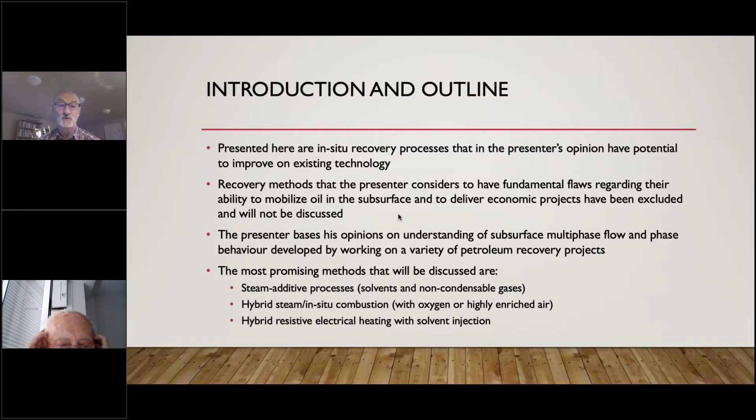So as I said, I'm presenting those technologies that I think have a lot of potential, and I've left out anything about those projects that I don't think are going to be very good. I'm basing my opinions on understanding that I've developed over the years of how fluids flow in reservoirs in the subsurface. And this comes from many years of working on a wide variety of different kinds of projects, conventional gas projects, unconventional gas projects, secondary recovery projects, thermal recovery projects, and so on.

The most promising methods that I think exist are steam additive processes, and those additives are solvents and non-condensable gases. Hybrid steam and in-situ combustion processes, especially using oxygen rather than air, oxygen or highly enriched air, and hybrid resistive electric heating projects along with solvent injection. So those are the three categories that I think hold the most promise for improvement.

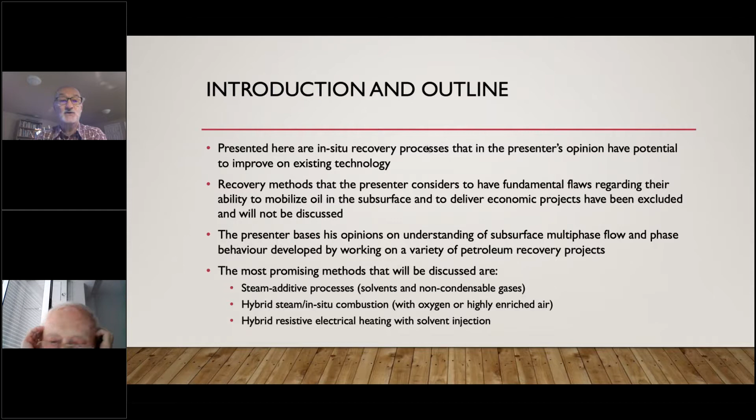Currently, for the first time in many years, we have high enough oil prices for companies to actually make a reasonable profit. We've had a lot of opposition to the petroleum industry developing over the last few years. And in Canada, this has resulted in opposition to pipeline development, which has essentially truncated heavy oil and oil sands development, because without export capacity, there's no point in developing more production capability.

Around the world, carbon penalties are gradually being imposed by governments. And so if you can find recovery methods that reduce the carbon emissions, as time goes on, this is going to have benefit to your oil production operations and the economics of those projects. Generally, public sentiment has been rising against the petroleum industry. Certainly here in Canada it has, and I think it's gradually growing around the world.

But at the same time, there is going to be a need for oil production for a considerable period of time in the future, in my opinion. There are many people who would rather not be dependent on oil, but currently all of our infrastructure, all of our systems are based on petroleum production, and that's going to continue for some time. Even if you desired to get away from using oil production, it's really not possible in the short term because of the time and money that it will take to replace it.

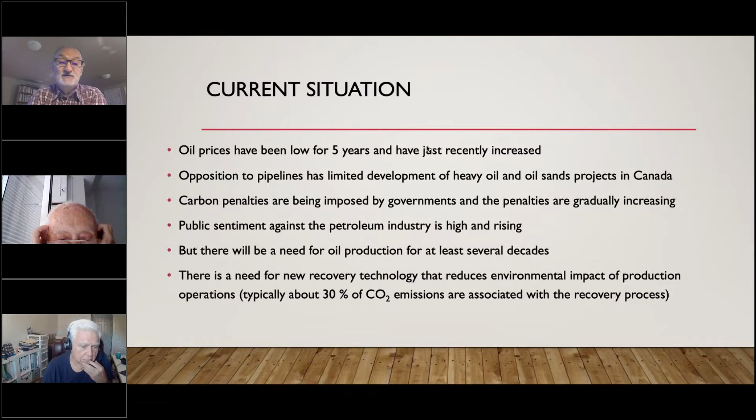So there's a strong need for new recovery technology for heavy oil and oil sands that reduces the environmental impact. And typically between, let's say, 25 and 35% of the carbon emissions associated with the production and ultimate consumption of the petroleum comes from the recovery operations themselves. So if you can find a recovery method that reduces or eliminates the carbon emissions, then you have potentially reduced the carbon emissions in the overall development, production, and use of the petroleum by about 1/3. And so this would be a great thing, and it would go a long way to improving the reputation of the industry.

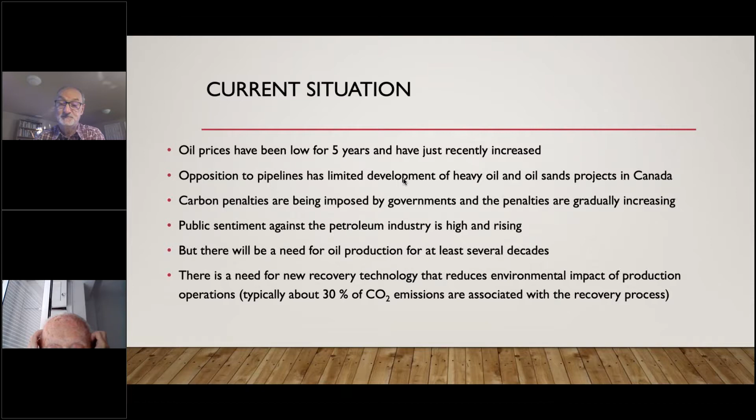What we're seeing today is rising oil prices, partly, I think, because of the lack of investment in new production, and also the fact that economies are recovering from the recent pandemic, and this is driving, I think, the recent spike in oil prices. But the world is in transition, trying to move away from the use of coal, oil, and natural gas to the extent possible.

So the main motivation in developing new recovery methods is to reduce carbon emissions that it seems most people think are responsible for climate change and the current problems that we're having.

Solar and wind power costs have come down substantially in recent years, and so these forms of energy production are becoming very competitive with petroleum. But nevertheless, we're going to see a continued need, I think, for the development of heavy oil resources. And many countries need to do this to sustain their economies. And Venezuela is one of those countries.

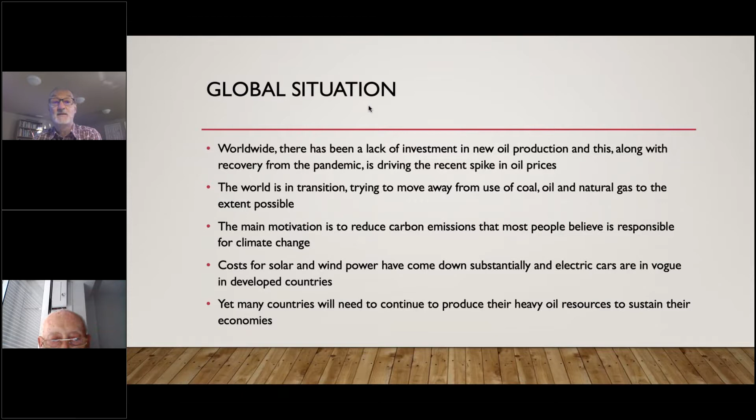I think it's probable that the demand for oil and gas is going to increase rather than decrease in the next few decades. And I find it difficult to understand how we're going to replace oil and natural gas for a number of applications, including home heating in northern climates. I mean, I don't know what we would do here in Canada, for example, without natural gas. There is no alternative right now for jet fuel, I don't think. And natural gas is used for a wide variety of purposes in addition to heating.

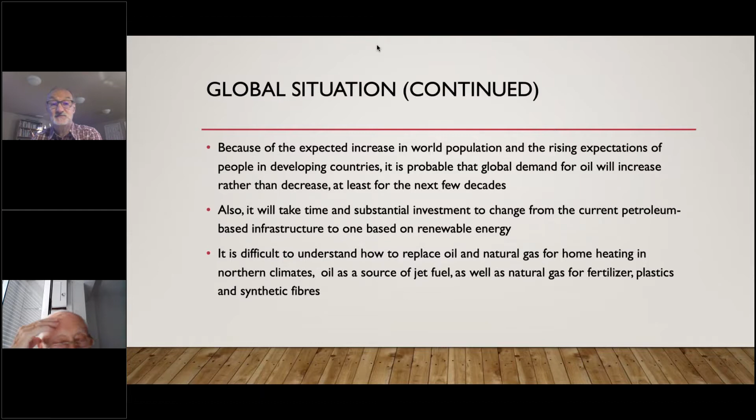So the challenge is to reduce the environmental impact of the production and at the same time improve the economics. So what we're looking for is recovery methods that reduce capital and operating costs, lower carbon emissions and water usage, maintain high oil production rates and recovery factors, and improve the economics. And this is a very tall order, a very difficult thing to meet all of these criteria simultaneously. But this is what needs to be done.

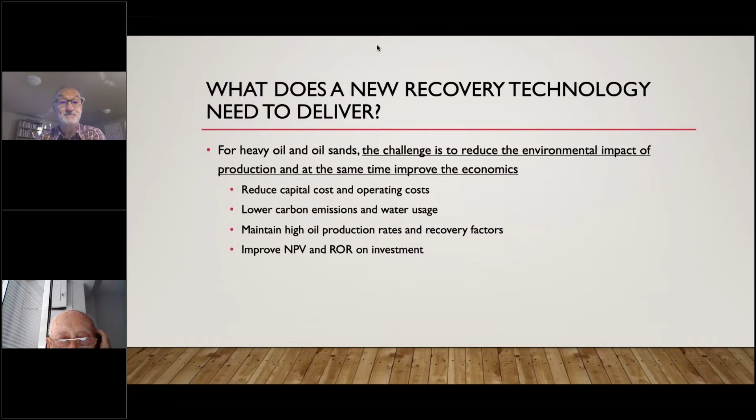So if we talk about the heavy oil recovery processes and the way they work, the fundamental problem, of course, is that the heavy oil and oil sands are viscous in the subsurface, and so they don't move very quickly. They don't produce at a high rate. There are two ways of reducing the oil viscosity so that the oil will move faster. One way, of course, is to heat it, and the other way is to mix lighter compounds, such as solvents, with the heavy oil. So these are the two methods that work to reduce viscosity and move heavy oil and oil sands at commercial production rates.

Flooding processes such as steam flooding, water flooding, and so on tend to have poor sweep efficiency. So the injected fluids tend to travel quickly through the reservoir and break through rapidly at the production wells, leaving most of the oil behind. And this is because of what's called unstable fluid displacement, because the fluids that are displacing the heavy oil are much less viscous than the heavy oil itself, and so they tend to just finger their way through the heavy oil and leave most of the oil behind.

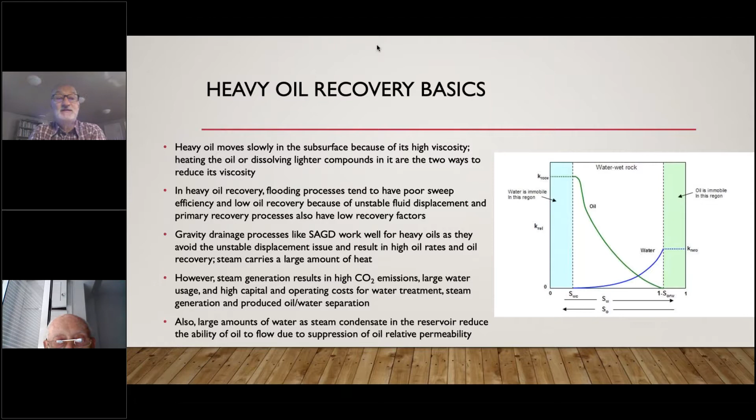An alternative to heating the heavy oil using steam is to mix solvent with it. And when solvent is mixed, all of the mixture is in the oil phase. So rather than having competing phases, when you add solvent to the oil, of course, it increases the volume of oil, but it's still all oil phase when you have the solvent mixed with it. So you don't have a water phase flowing that's now competing with the oil. You only have the oil phase. So this tends to allow the oil phase to stay at a high saturation and be able to flow at a high relative permeability.

In discussing new recovery methods, there are other things that need to be considered, and there are the differences in heat transfer between conduction and convection. So with steam injection, most of the heat transfer is convection. Some methods that I'll talk about use primarily conduction heat transfer, which is slower than convection heat transfer. And then there's also a difference between what's called thermal and molecular diffusion. So if we're injecting solvent into a reservoir, we become dependent on molecular diffusion to get the solvent into the oil to reduce its viscosity. And this type of diffusion, molecular diffusion, is much slower than thermal diffusion. So these two things, using conductive heat transfer and relying on molecular diffusion, tend to slow the process down.

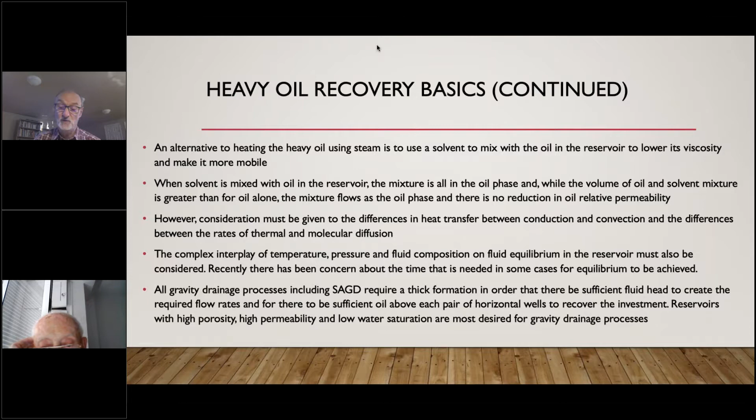So, just very briefly, SAGD has been the preferred method for the last 20 years or so for oil sands production, and it works by injecting steam into the upper well in a horizontal well pair.

Excuse me, I have to shut this off.

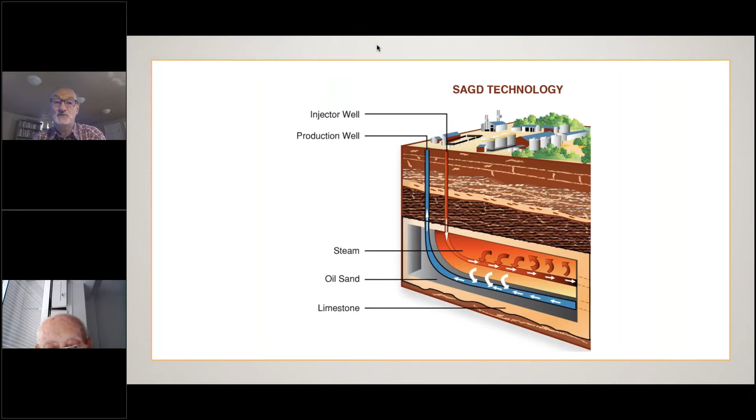And then the oil and water, steam condensate and oil, drain down to the lower of the horizontal wells and is produced. So as I said at the beginning, there are several methods that could meet the necessary criteria of lower costs, lower environmental impact, and improved economics, and these are steam additive processes, hybrid steam in situ combustion processes, and hybrid electric heating solvent injection. Now, these processes tend to be technically complex.

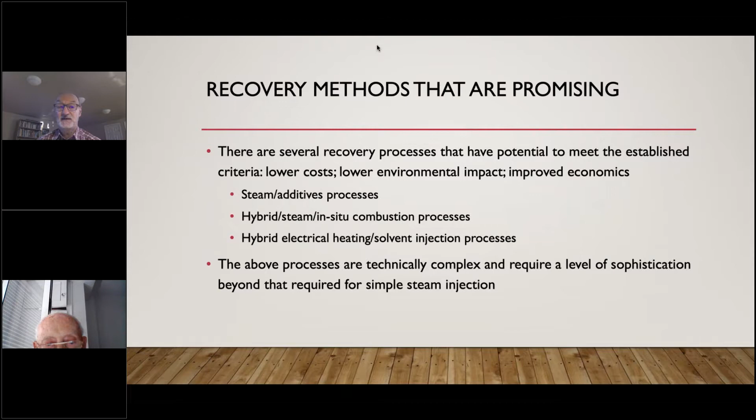The third one, the electrical heating solvent injection, is probably the simplest. But anyway, these processes require a level of sophistication beyond that for simple, could I call it, steam injection. But if they can be done properly, they can be quite successful. So the goal ultimately is to reduce the steam-oil ratio, so the amount of steam that's required per volume of oil. And this automatically reduces the carbon emissions and water requirements.

And the preferred additives to steam are hydrocarbon solvents or non-condensable gases. It's possible to mix the use of solvents and non-condensable gases throughout the recovery process. It may not be necessary to be injecting them at the same time. For example, solvents could be used early in the process and non-condensable gases later. A properly operated steam solvent process can reduce the steam-oil ratio about 1/3 while maintaining or slightly increasing the oil production rate.

In Canada, about a dozen field pilots have been operated with solvent addition to steam, and overall the results have been mixed. Some projects have failed, some have been successful, and in my opinion, the ones that have failed have been improperly designed and poorly executed in the field, and that was the cause of the failures, not the technology itself. If you want to see a properly executed test that proved the viability of solvent addition to steam, I've given a reference here to a 2015 paper, and this was one that referred to a pilot project that was done in the Cold Lake oil sands by Imperial Oil.

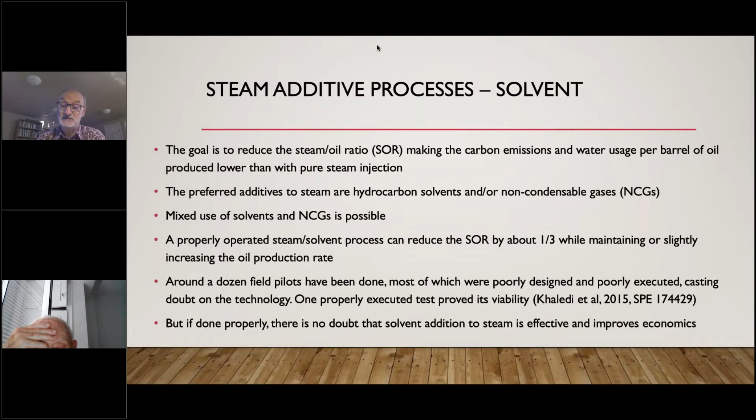In my opinion, if done properly, there is no doubt that solvent addition to steam is effective and improves the economics of a SAGD project. It's relatively simple in an existing project to add solvent. And if you do that and you reduce the steam-oil ratio, you free up or make available steam to use in other wells. And so the total production rate for the project can increase without significant additional capital investment in facilities.

You, of course, need to add equipment for solvent injection and solvent recovery on surface, but you don't need more water treatment equipment to increase the size of the steam plant or the oil water separation equipment. To make it work well, you need to use the right kind of solvent. You need to choose the right solvent, and hopefully the solvent is the least expensive that you can find. You need to use the right concentration of solvent, and this is typically between 10 and 20 volume% in steam. And you need to add the solvent at the right time in the process.

In the case of some of the failed tests, the wrong solvent was used, in my opinion. The solvent concentration was often too low, and so it didn't have the desired effect. And it was injected too late in the process, when most of the oil had already been recovered. So it didn't show any real benefit. The solvent chosen should ideally have similar phase behavior to steam, so that the solvent can be vaporized with the steam and can travel with the steam in the reservoir.

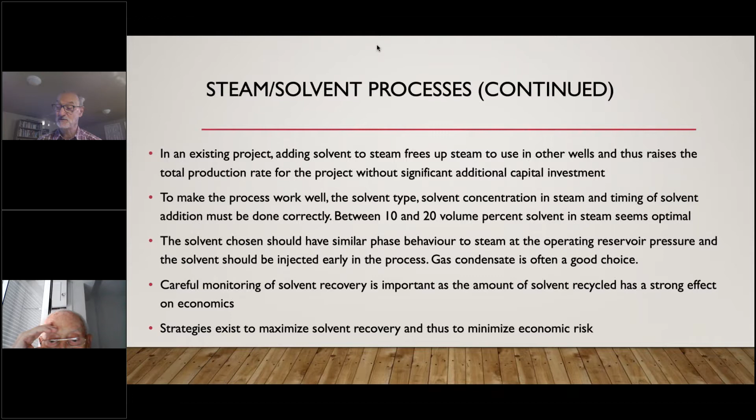I think also many of the pilot tests that have been done have reported quite low solvent recovery, but I think in many cases this was because of poor monitoring and sampling and testing, which resulted in inaccurate measurement of the amount of solvent being produced. And then the other thing is that there are strategies that can be used to maximize solvent recovery and thus to minimize the economic risk of adding solvents, which tend to be quite expensive, and you really can't afford to lose a lot of it in the reservoir.

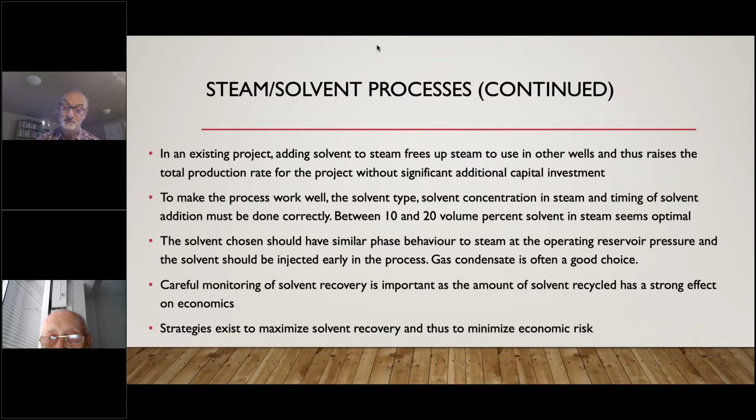Non-condensable gases have been used for many years and can be quite helpful. There's a company in Canada called MEG Energy that has had quite a bit of success using non-condensable gas additives to steam in the Athabasca oil sands

in their SAGD processes. And what they've been doing is waiting until the SAGD production is quite mature, the steam chambers are well developed, and maybe even intersecting, where the steam chambers from individual well pairs have met in the reservoir. And what this allows is to reduce the amount of steam being injected, and the non-condensable gases are able to rise high in the formation, displace already heated oil downward into the horizontal production wells, and free up steam or make steam available to be used in other wells. So this has been a fairly successful approach for them.

Non-condensable gases, by definition, do not condense. What happens with steam is that as it rises in the formation and cools, it gradually condenses into water, or steam condensate. And then because the steam condensate is heavy and dense, it starts to drain downward again. So it's often difficult to get steam right to the top of the formation. But non-condensable gases just continue their upward movement in the reservoir, and they tend to accumulate in the upper part of the formation, displacing warm oil downward, and they provide what we might call an insulating blanket at the top of the reservoir, which protects against heat losses.

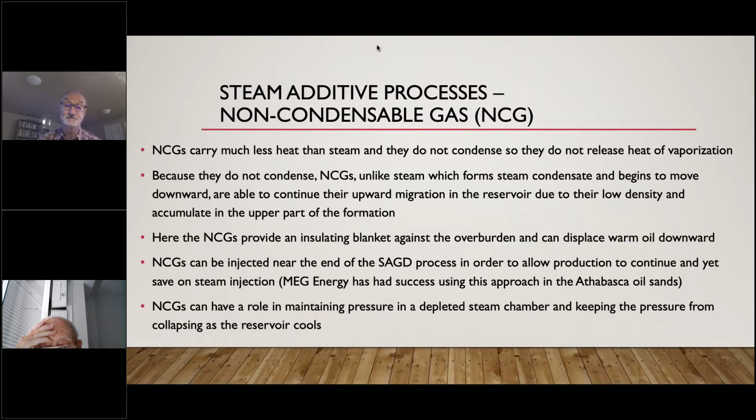And they can be used near the end of the process to save on steam. Non-condensable gases can also be used in maintaining pressure at the end of the SAGD operations to keep the pressure from collapsing as the reservoir cools. Many studies, laboratory, simulation, and field testing, have shown that relatively small amounts of non-condensable gas have a beneficial effect, but you have to be careful, like in the case of water, not to suppress the relative permeability to oil by putting too much gas in.

There's been a lot of talk about using direct oxygen-fired boilers, where the mixture of steam that's generated and the combustion gas products are injected together. But this often ends up with too much non-condensable gas, even if you use oxygen rather than air. And using oxygen rather than air eliminates 80% of the gas.

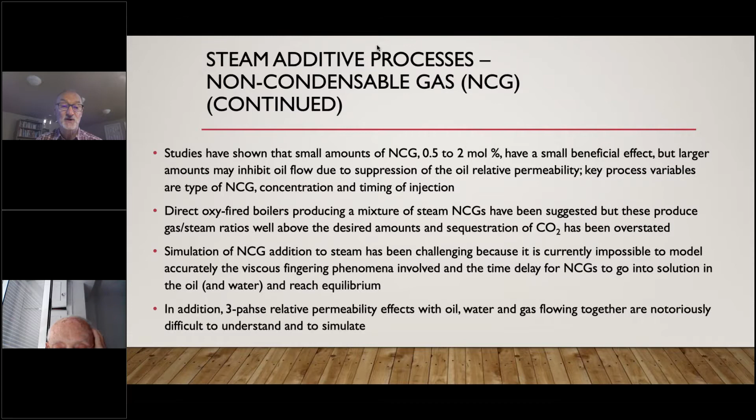Simulation of the behavior of non-condensable gases in reservoirs has been quite challenging because the simulators don't incorporate what's called viscous fingering, or unstable displacement, and they also don't accommodate the time delay for the non-condensable gases to go into solution in oil and water and to reach equilibrium conditions. And so if the non-condensable gases are modeled as being in solution in the liquids, it means they're not in the free gas phase and moving in the free gas phase. Whereas in reality, they really are still in the free gas phase for some time in the reservoir, and so they move very quickly to a different part of the reservoir than a simulation model would say.

The main advantage of in-situ combustion over steam is that heat is generated directly in the reservoir by burning fuel in the reservoir. So this eliminates the inefficiency of heat transfer in the boilers on surface, and it also eliminates the heat losses in the surface lines and in the wellbore. In situ combustion typically uses a residual fuel in the formation, either unrecoverable residual oil or hydrocarbon coke that's formed by pyrolysis. And so there's essentially no cost for fuel in the case of in situ combustion. But there are many problems with in situ combustion, pure in situ combustion processes, as well as hybrid steam and in situ combustion processes.

Most people are familiar with these problems and challenges, but it's very important to ignite the oil in the subsurface properly, and having steam present tends to promote that because you're already at steam temperature. It's very important to maintain high temperature oxidation conditions because low temperature oxidation tends to degrade the quality of the oil and produce a lot more coke by pyrolysis than high temperature oxidation.

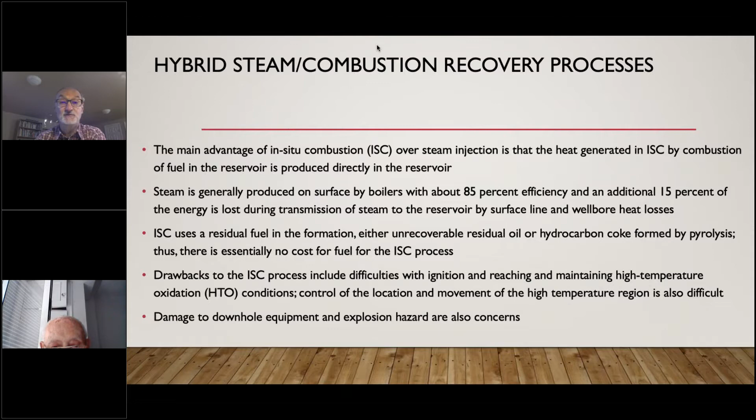Other problems with in situ combustion include production of tight emulsions, production of large quantities of non-condensable gases, so that would be flue gases in the case of air injection, or carbon dioxide in the case of oxygen injection, and high gas velocities in production wells can promote sand production and erosion of downhole equipment. But the main problem is severe suppression of the relative permeability to oil.

The use of oxygen or highly enriched air eliminates many of the aforementioned problems by getting rid of the nitrogen. And interestingly, if you inject 9 volume% oxygen with steam, approximately 50% of the energy delivered to the formation, so the combustion of residual oil in the reservoir by the oxygen injected, generates 50% of the heat, and the other 50% is injected with the steam. So putting in relatively small amounts of oxygen can have a huge benefit in terms of the amount of heat delivered to the formation.

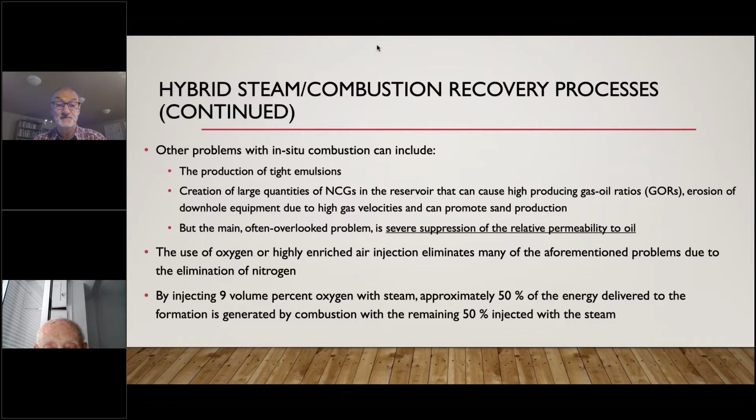I think I'm going to have to speed up a bit here. This is taking longer than I had expected. Don't worry, you can take your time. Is it okay? Okay, thank you. Okay.

So many challenges exist, and these include managing the high temperatures in the reservoir and controlling the location of the combustion zone. There have been concerns about cap rock integrity, that is, these high temperatures increasing the stress in the reservoir and perhaps breaking the cap rocks. I've done some detailed studies of this myself, and what was found was that it's really the pressure that is the biggest risk, not the temperature. So the risk of a hybrid steam combustion process is about the same as a pure steam injection process.

There are some unpleasant side products of combustion, such as hydrogen sulfide, that have to be monitored and handled very carefully. And then, of course, if you're going to inject oxygen, you have to have oxygen production and storage facilities on surface, and you have to be able to move the oxygen to the wellheads safely. This can be done and has been done, but it's not a simple thing, and so it requires a certain sophistication in the operation to enable this.

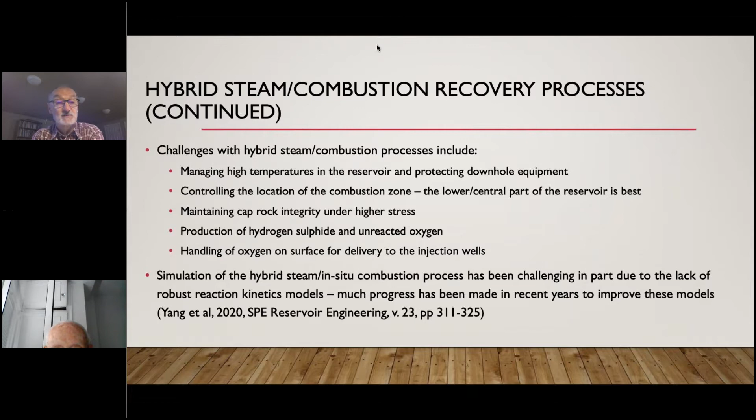A lot of progress has been made in recent years to improve the modeling of hybrid steam and in-situ combustion, and I give a reference here to a paper that appeared last year in SPE Reservoir Engineering, if you would like to refer to that work.

Now, I'd like to talk about hybrid electrical heating with solvent. There have been many different electrical heating processes proposed, and I don't want to talk about those and compare them, but for me, the most promising one is to use resistive electric heaters with solvent injection. This method is very simple compared to hybrid steam and in-situ combustion, and even compared to solvent addition to steam.

And the technology exists. There are electric heaters that have been proven that can run at temperatures as high as 800 degrees C for long periods of time. The temperatures being contemplated for this process are much lower than that, and so presumably these heaters would last a long time, being run at much more moderate temperatures. So the method relies on a combination of mild heating and solvent mixing to facilitate oil production.

The original concept was presented in a paper at a conference in 2007, and it appeared in the Journal of Canadian Petroleum Technology as a peer-reviewed article in 2010.

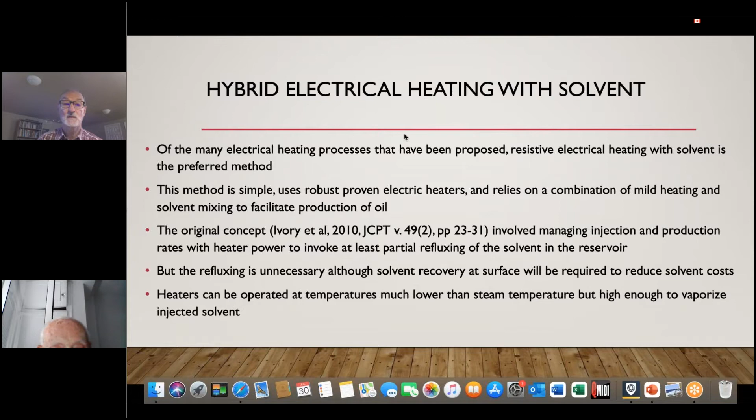And this process could be called solvent-assisted resistive electric heating, or SAREH. And the amount of energy that's required in SAREH is much less than in steam-based processes, and the carbon emissions are significantly less. In fact, if you can generate the electricity in some way without burning a fuel, then there are essentially no carbon emissions directly attributable to the recovery process.

So if you're using electricity generated by hydropower or solar power or wind power or geothermal or something like that, or even nuclear power, you can say that you don't have carbon emissions associated with the recovery process. And if only solvent is injected, then there's no need for water injection or water treatment.

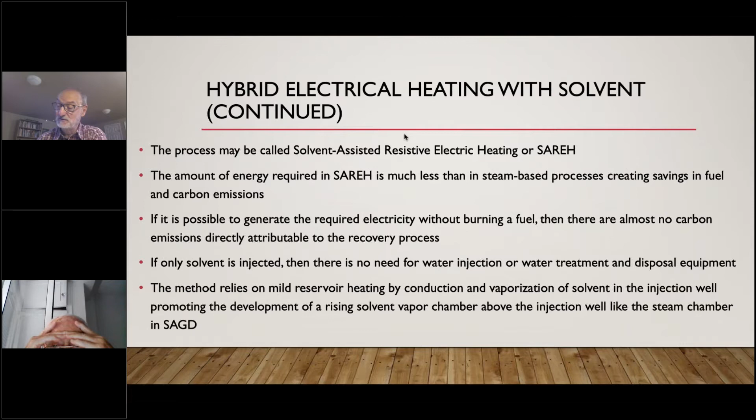So the method relies on relatively mild reservoir heating, but heating sufficient to vaporize the solvent, and the promotion of a rising vapor chamber above the injection well, similar to SAGD. I will say too that there may be a way to use single horizontal wells to do this. It would involve a more complex well completion, but if it can be done with single wells, there would be an even greater saving in capital cost.

In this method, formation heating is mainly by conduction, which is slower than convection. But this slower heating is also partially offset by viscosity reduction caused by solvent mixing. The lower oil production rate that would be experienced with this method compared to steam-assisted gravity drainage, the economics are still better than steam-assisted gravity drainage because there's lower energy input to the formation.

There's virtually no water flow in the formation, which inhibits the flow of oil. And the capital costs for water treatment and steam generation, etc., are eliminated. Oil water separation equipment would be minimal or perhaps completely unnecessary, depending on the reservoir. And interestingly, if for example you have an existing steam project with cogeneration of steam and electricity, then you have electricity available. So you could be operating a SAGD process along with a SAREH process at the same time. And the only additional capital involved would be for the solvent storage and recycling.

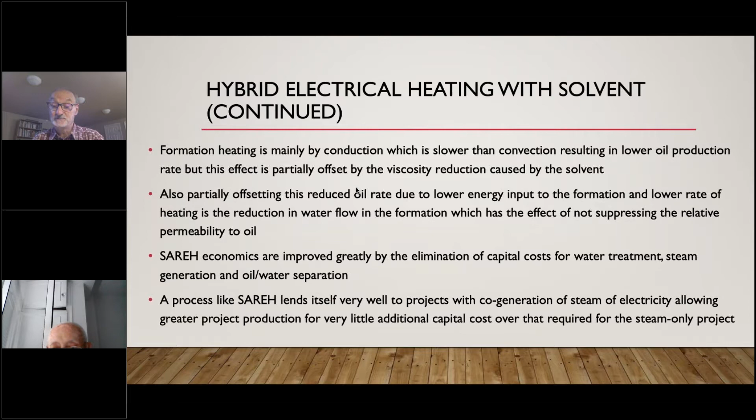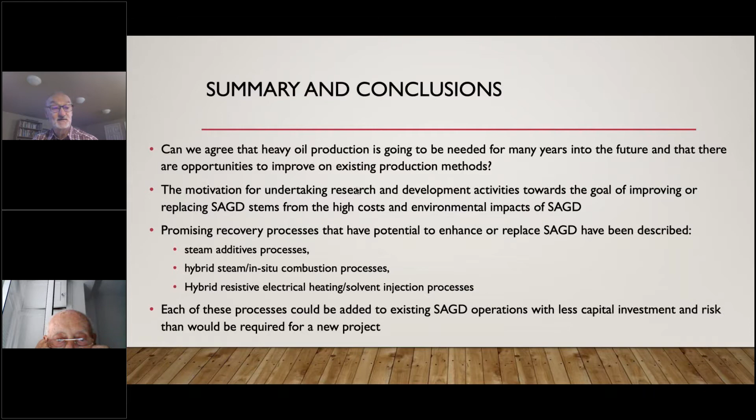So by way of summary, I would ask, can we agree that heavy oil production is going to be needed for many years into the future, and that there are opportunities to improve on existing production methods? The motivation for undertaking research and development toward replacing SAGD stems from the high costs of SAGD and its environmental impacts. The promising new processes involve additives to steam and hybrid steam and in-situ combustion and hybrid resistive electric heating and solvent processes. And each of these processes could be added to existing SAGD operations with less capital investment and risk than would be required for an entirely new project.

I have done myself a very detailed economic comparison of all the processes and found them to be better than steam-assisted gravity drainage with steam-only injection. All of the processes mentioned have a reduced carbon footprint and water usage, and as carbon penalties rise, the economic case for these new methods is strengthened.

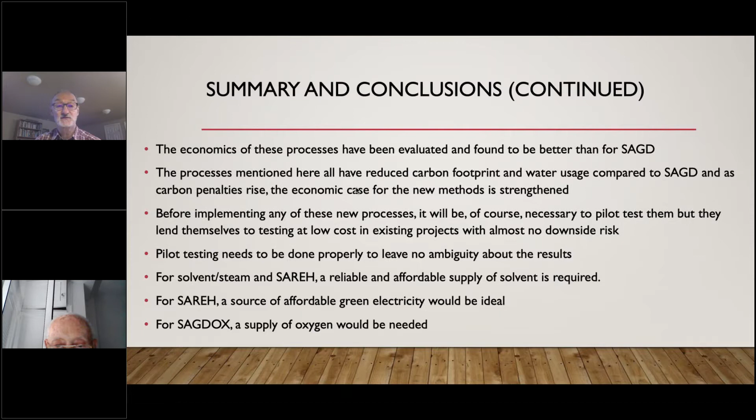At this point in time, in the case of SAREH, for example, it has been tested in the laboratory. Numerical modeling has been done, economics have been done, but the process requires field testing, field piloting. And I think probably ideal places to do this would be in existing steam operations. And there's almost no downside risk, because let's say you have a SAGD project operating, you have to drill some wells to maintain production. You could drill some wells, test out SAREH. If it's not working to your satisfaction, you can just convert the wells to SAGD wells.

The other point I'd like to make is that pilot testing needs to be done properly, so at the end, there is no ambiguity about the results. If it fails, it should be very clear that it failed, and it should be known why it failed. Similarly, if it succeeds, it should be known why it succeeded, and there should be no doubt about its success. And this can only be done by very careful monitoring. And of course, it costs more money to do this properly. But it's almost better not to do the test at all, in my opinion, than to do it improperly and leave the situation where you're not sure whether it worked or it didn't work because you don't know what to do next.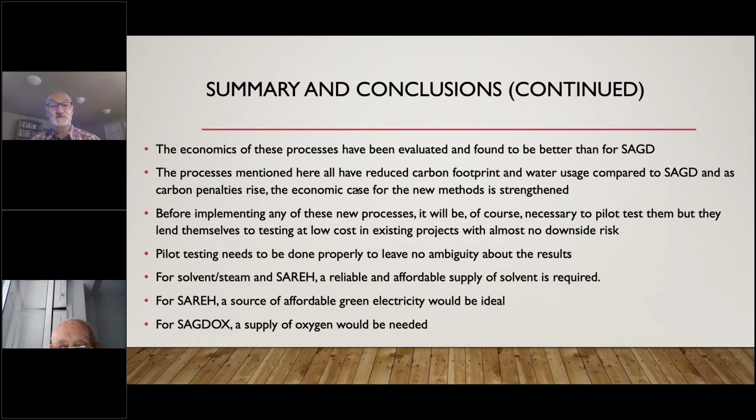And of course, for a process like SAREH, you need a reliable and affordable supply of solvent. And ideally, a source of so-called green electricity. And for SAGDOX, being the name for a process combining SAGD and oxygen injection, you need a supply of oxygen.

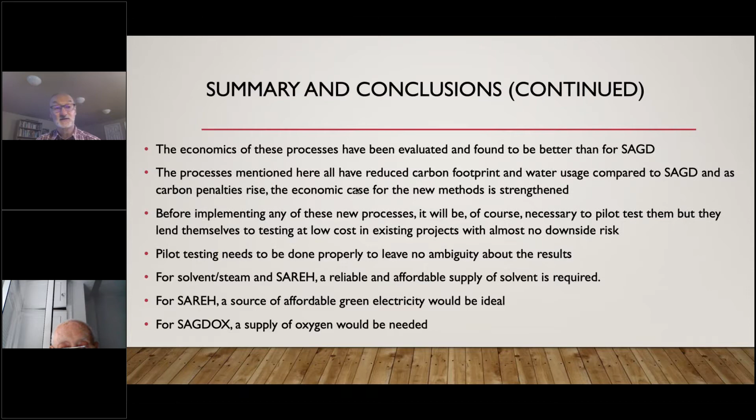So steam additives have been tested in the field with mixed results, although I think the failures have been because of poor design and execution. Hybrid steam oxygen injection has been studied in large-scale laboratory equipment and has been successfully simulated at the field scale, but it still needs field testing. Same with the hybrid resistive electric heating and solvent processes. Laboratory testing has been done, the process has been simulated, but it needs to be field tested.

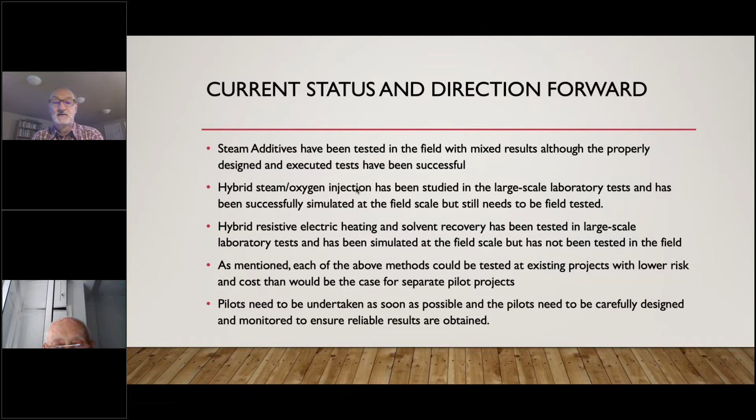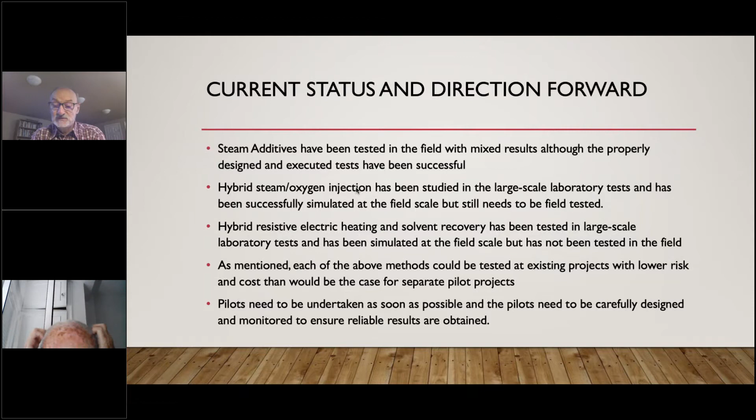And each of these methods can be tested with existing projects, minimizing cost and risk. And the cost would be lower than those that would be encountered in setting up separate field pilots. Pilots are needed now because it takes some time to develop the pilot procedure, to put the equipment in the field, and to run the pilot for several years to make sure everything is working properly. So there's some urgency to moving forward with testing of these technologies.

Advantages, again, are lower upfront capital exposure. Processes like SAREH, because they use a lot less equipment, are potentially applicable to small, high-quality pockets of good resource. They need only a supply of power, some solvent storage, and recycling equipment. So the technology could be economic at a small scale. The testing risk is very low. And as I said, wells can be converted back to SAGD if necessary.

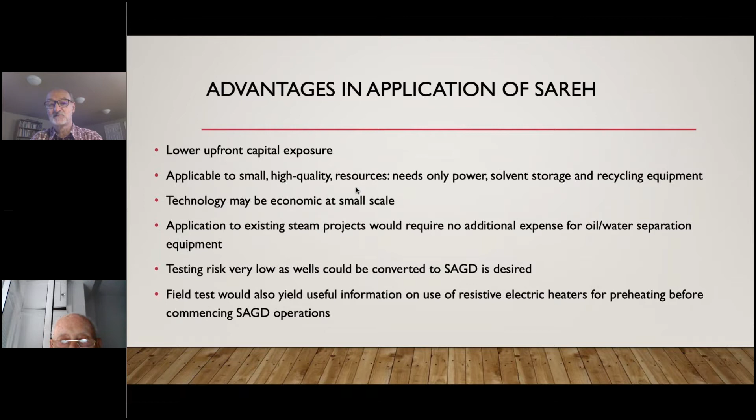And then the other thing is, if you were in an existing operation, there's been some talk about using resistive electric heaters for the preheating phase of SAGD before production operations commence. And a test of a resistive electric heating and solvent process could be done, and also gather information about the effectiveness of using resistive electric heaters for the preheating phase. So that ends my presentation, and I'd be happy to answer any questions that people might have.

Thank you, Tom. Thank you for this excellent presentation on processes for enhanced heavy oil recovery. There are several questions in the chat. I will address it to you.

Okay. Can I see, are the questions in Spanish? No, they're in English. Can I see them? Yes, if you open the chat, let me take the screen out. Give me a second, I'm trying to find my cursor. Ah, there we go. Can you see it now? Well, I will read them to you, okay? If you open the chat, there are some questions in the chat, and they're in English.

The first one is, Carlos, how do I open the chat? There is a small oval circle in the upper part of your screen, you should have the attendees, a couple of little persons, an oval circle, and the settings. If you open the circle, can you see it? The settings thing? No, beside the settings, before the settings. Oh, there. I see. Yeah. Okay.